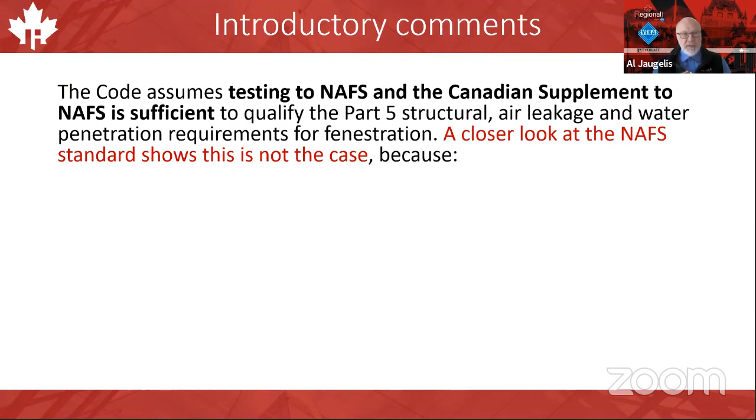A couple of introductory comments to set the stage. The code assumes that testing to NAFS and the Canadian supplement to NAFS is sufficient to qualify the Part 5 structural, air leakage, and water penetration requirements for fenestration. But if we take a closer look at what the NAFS standard says about its testing, we realize this is not the case, because NAFS testing doesn't actually test the structural attachment of the windows to the walls. It doesn't test the air or water tightness of the window to wall interface.

And it doesn't qualify the glass strength of the products either. The fourth item is just the practical reality that it's not possible for manufacturers to pre-test all the possible options of their product lines, so they cannot qualify the complete range of sizes and configurations that architects and customers expect.

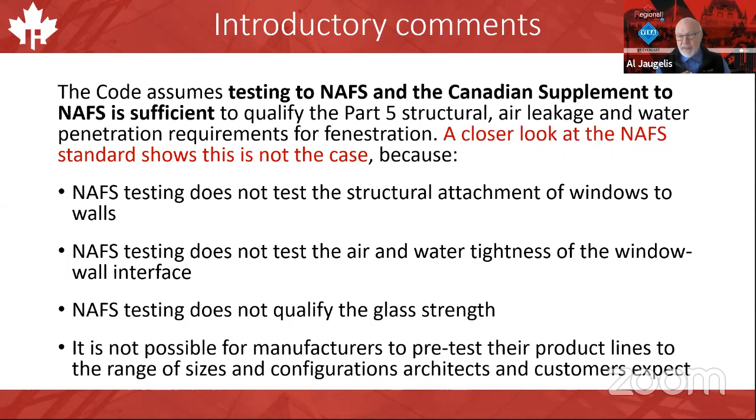Now, in some jurisdictions, architects are required to ensure that registered professionals are involved in the preparation of design and to ensure that the work of the contractor is reviewed for alignment with the design through in-shop or on-site field reviews. So the involvement of registered professionals in design and review can address the things that NAFS testing leaves out.

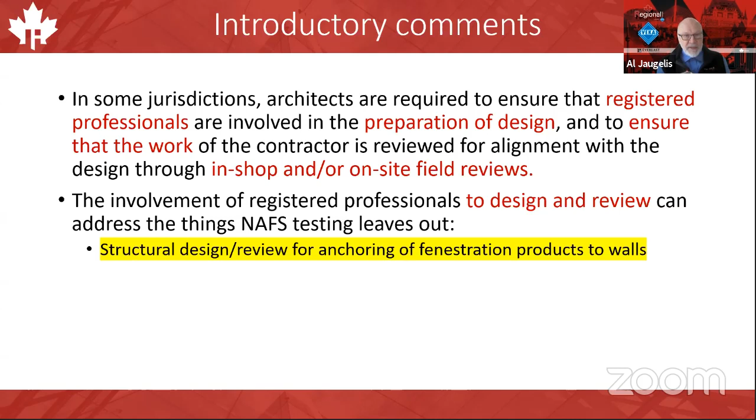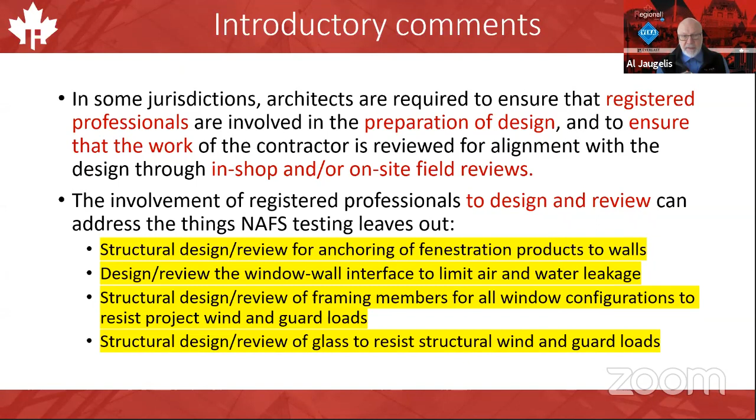The structural design and review of anchoring of the fenestration products to the walls, design and review of the window to wall interface to limit air and water leakage, the structural design and review of framing members for all window configurations to resist project wind and guard loads, and structural design and review of glass to resist structural wind and guard loads.

So in this session, we'll review the Part 5 structural, air, water requirements of the 2019 Alberta Building Code, which are the same as the 2015 National Code. We'll review the limitations of lab testing with reference to the 2011 edition of the North American Fenestration Standard.

And we'll identify areas where professional design and field review are required for windows, doors, and skylights in non-exempt buildings—basically to address the gaps between what the standard covers and what the code assumes the standard covers. Finally, we'll discuss current challenges faced by industry with respect to the need for professional design and field review.

That's a topic Dave will pick up on after Randy speaks. So the topics we're going to cover here—this is not a long presentation, but it's going to set the stage for our subsequent discussions.

First of all, why is the NAFS standard in the code? Is NAFS testing sufficient to address Part 5 requirements? We're going to look at the actual language there, and ask the question: is professional design and field review necessary for windows and doors in non-exempt buildings?

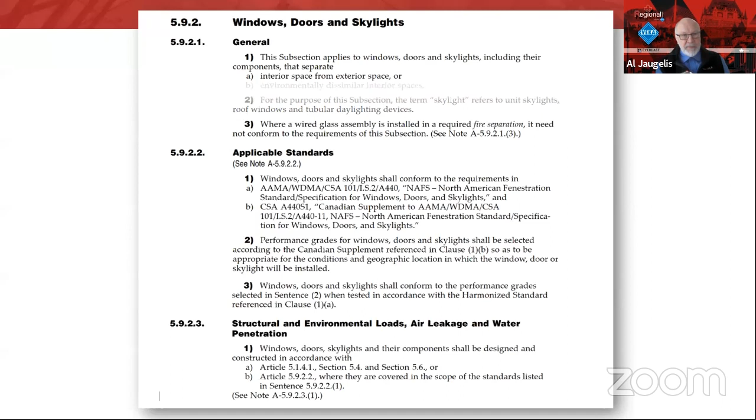So I find it helpful to obscure that for the moment and get right down to why is the NAFS standard in the code, or another way to rephrase it, what is the main thing Part 5 is concerned about when it comes to windows, doors, and skylights?

And we find that right here in Article 5.9.2.3, titled Structural and Environmental Loads, Air Leakage, and Water Penetration. Structural, air, water—these are the three properties the National Code says are the Part 5 properties for windows, doors, and skylights.

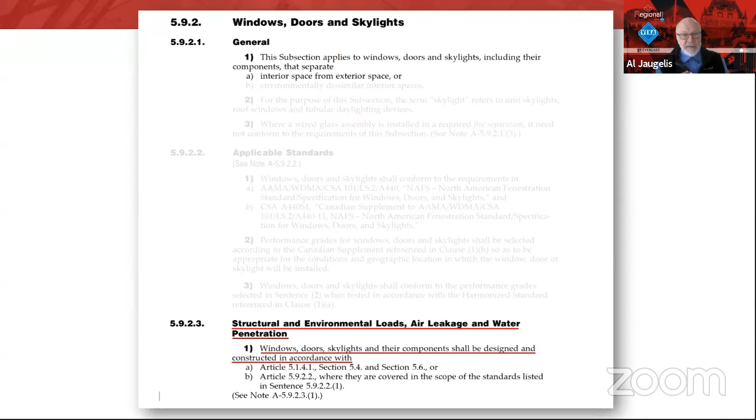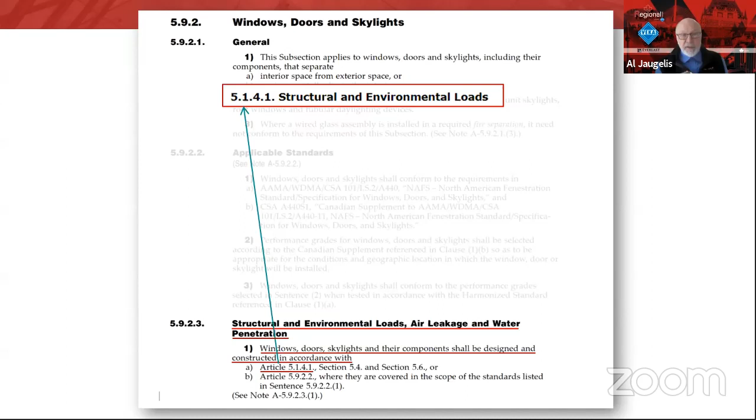And it tells us how they shall be designed and constructed: in accordance with Article 5.1.4.1, which deals with structural and environmental loads; in accordance with Section 5.4, which deals with air leakage; and in accordance with Section 5.6, which deals with precipitation and preventing precipitation from damaging the building integrity or affecting the use or occupancy of the building.

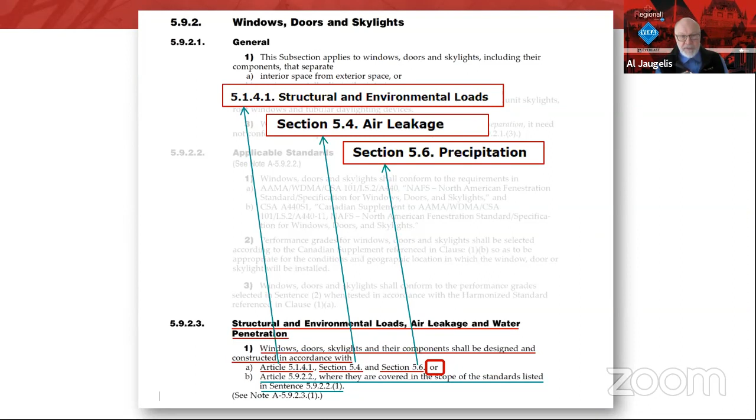And then we have an 'or' - instead of designing for structural environmental loads, instead of managing these three items from the Part 5 point of view, Article 5922, where they are covered in the scope of the standards listed in sentence 59221. Now we come to Article 5922, applicable standards.

This article is telling us that windows shall conform to the requirements in NAFS or the Canadian supplement to NAFS. And then it talks about performance grades being selected and so on. I think it's very important to read this Article 5922 with reference to Article 5923.

What this is telling us is the code seems to think that if products are conforming to the NAFS and the Canadian supplement, they have satisfied the requirements of design and construction to Article 5141, Section 5.4, and Section 5.6. The code leads us to believe that, and I suspect the code writers sincerely may have thought that.

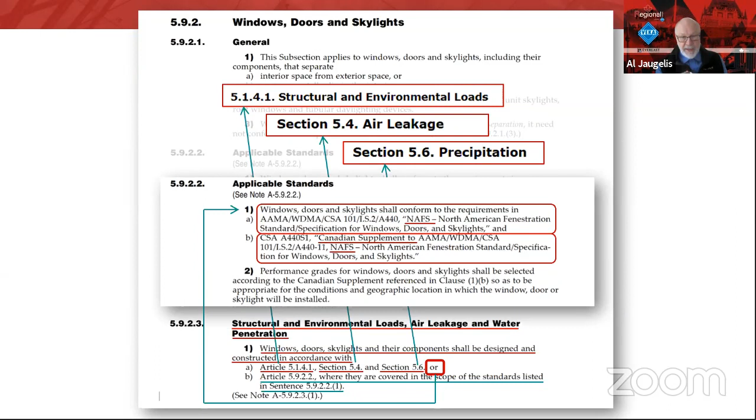But I would say that we need to have a look at the NAFS standard to check that out. So Part 5 makes it clear that the code believes testing to NAFS and the Canadian supplement is one way of qualifying windows, doors, and skylights for structural air-water performance. These standards also qualify secondary attributes such as ease of operation and durability, but those are not the concern of the code.

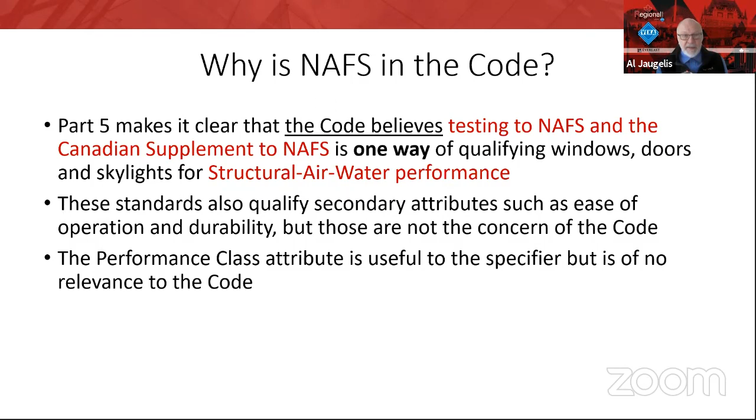The performance class attribute is really important in the NAFS standard for classifying products, and it's useful to the specifier, but again, it's of no relevance to the code. The code just cares about those structural air-water properties.

So let's have a look at NAFS testing, and does it address these Part 5 requirements? Here's what NAFS says about test specimen installation.

These tests are used primarily to evaluate the performance of the fenestration product and are not intended to test the performance of the installation, particularly the perimeter sealants between the fixture and the test specimen and the anchoring of the test assembly to the test fixture. So this is not the intended purpose of the standard. The standard is intended to qualify the product, and not how it's integrated into the building.

And that continues to say - sorry, this is my words, not the standard's words - yes, the testing of actual field installations is not required under NAFS and is not ordinarily performed by manufacturers.

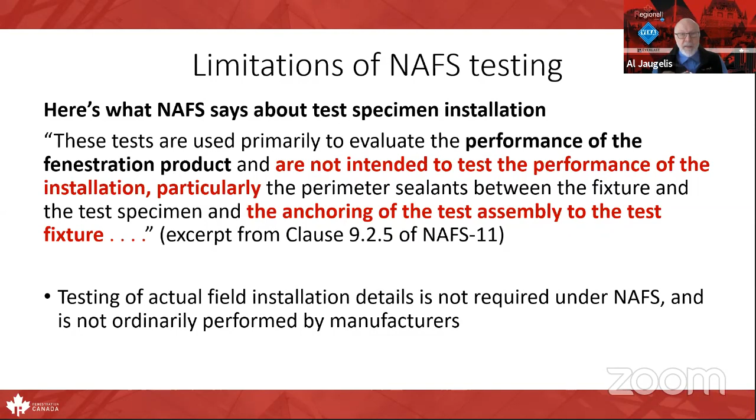So we're going to identify here four important limitations of NAFS testing. For one, it excludes testing of the anchoring method from its scope. Somebody has to deal with that. NAFS recognizes that it's not practical for manufacturers to test every possible anchoring method in every possible substrate.

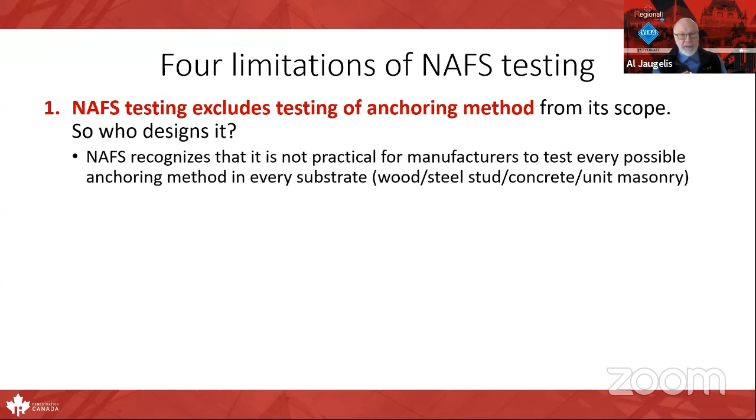There are wood walls, steel stud walls, concrete, unit masonry - each substrate, each wall condition might require different anchoring methods. And even if the methods are similar, you're going to have to require different fasteners given the different shear and pullout properties of fasteners in these different materials.

Secondly, NAFS permits test specimens to be anchored in ways that result in the highest possible structural ratings, and the anchoring of test specimens often differs from real-world anchoring methods. Basically, because the standard excludes the anchoring method from what is being tested, manufacturers are incentivized - they want to get the highest rating for their product because they're competing against company B, C, and D.

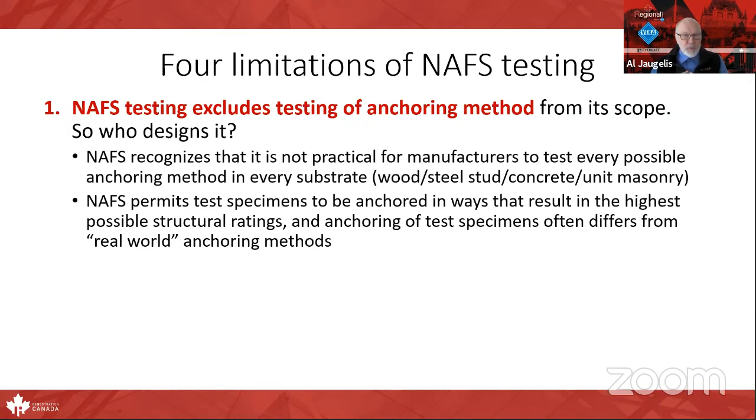And the reality is, if you had the opportunity to witness NAFS tests in a lab, you will typically find the products anchored in ways that are not the same anchoring methods you would use in a typical building configuration.

So it means that because NAFS specifically excludes the testing of any particular anchoring method, it means that it must be designed and reviewed by a registered structural engineer to address the building substrates of the building in question in a way that accommodates expected building movements and deformations.

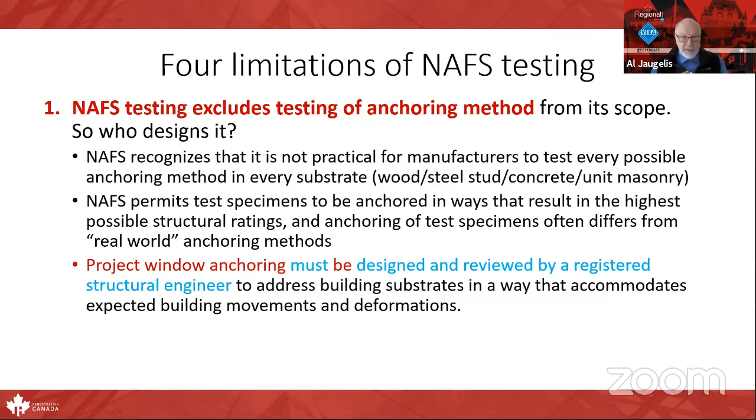It essentially requires there to be a face seal between the fenestration product and the test buck, and it requires that the interior side of the fenestration product be left open for examination to see if water is leaking between the joints of the product. That's the intent of the standard.

So it's not testing your typical weather barrier, or shall we call it the continuity of air barriers and water barriers in the wall to the fenestration product in a real world situation; that is not the purpose of the test. Now, granted, it is possible to conduct a NAFS test with a real world installation method, and that would be a valid thing to do.

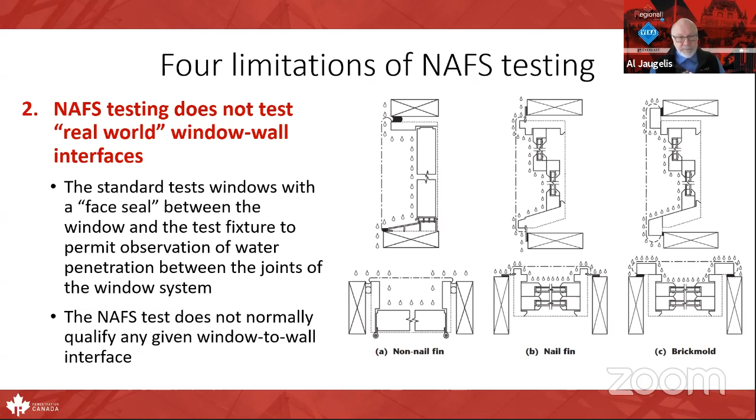But some of the real world anchoring methods require a drained sill pan under the window and other sealants and materials that would actually obscure what's going on with the window frame and make it difficult to tell if the window product is leaking through its own joints or not. And so while it's possible to test real world installations with the NAFS standard, it's not the intent of the standard. And so you can't assume that any given product has been tested with a real world window to wall installation method. So the NAFS test does not normally qualify any given window to wall interface.

Another limitation is that it's not practical for manufacturers to pre-test all the possible configurations of their product lines. Every window schedule will contain untested configurations and sizes. It's just a fact of life. And that means that project-specific engineering or post-award testing is required to qualify the untested sizes and untested configurations.

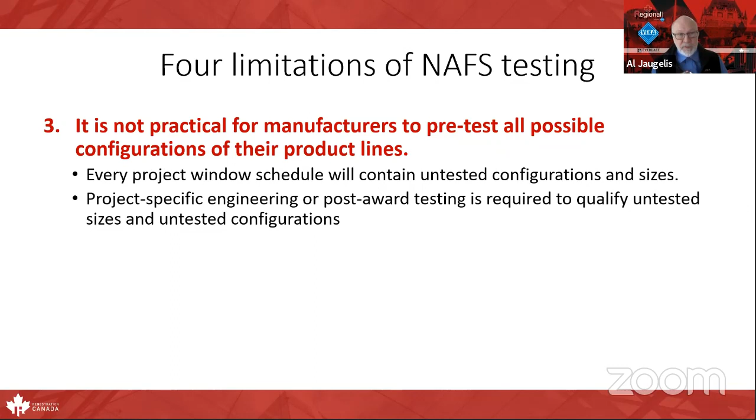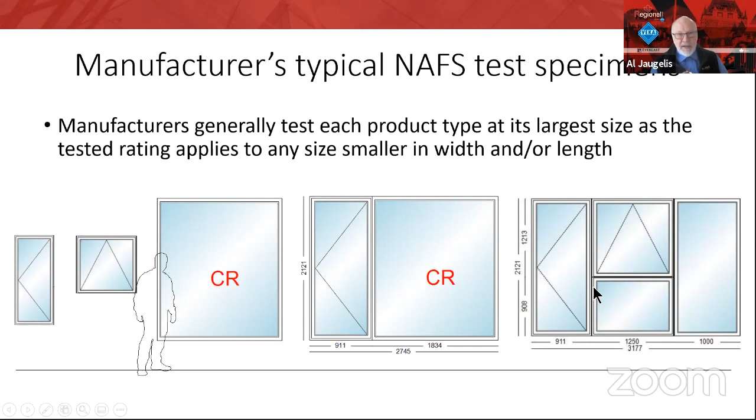And here you are actually testing field mulled joints or frame to frame mullion joints, which is a different kind of mullion condition. So the manufacturer will likely have at least this much testing and maybe a couple of other extra options. Maybe there are some other mullion or coupling options available. But this is the kind of thing you've got on file in your system.

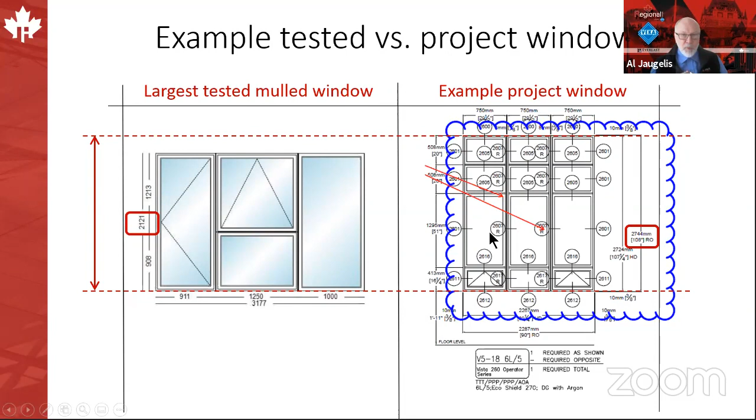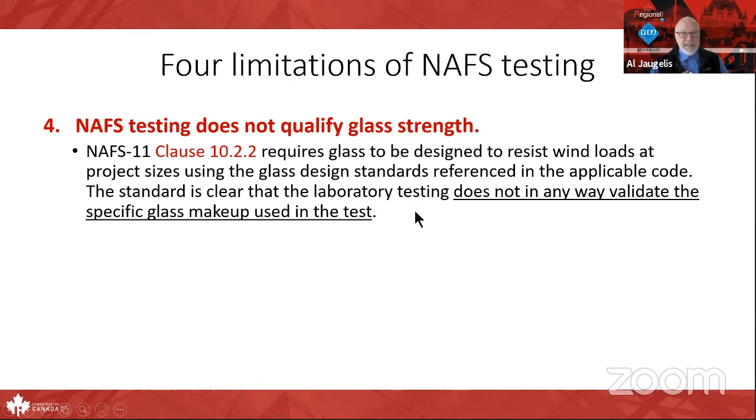So that's the reality. And finally, the fourth limitation is that the NAFS testing does not qualify the glass strength. NAFS-11 clause 10.2.2 requires glass to be designed to resist wind loads at project sizes using the glass design standards referenced in the applicable code. In the case of Canada, that would be CGSB 12.20, and the code now also allows ASTM E1300. But the standard is clear that the lab testing does not in any way validate the specific glass makeup used in the test. So the tested glass is not in any way representative of what should be installed in a window on any given project.

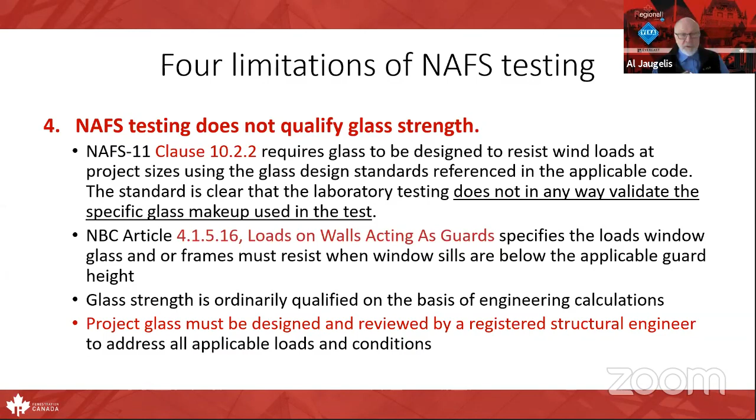National Building Code or Alberta Building Code Article 4.1.5.16, loads on walls acting as guards, specifies additional loads that windows often encounter, which is that the glass and/or the frames of windows must resist guard loads when they are below the applicable guard height. And practically speaking, in the industry, glass strength is qualified on the basis of engineering calculations, not on the basis of physical testing. That means that the project glass must be designed and reviewed by a registered structural engineer to address all the applicable loads and conditions.

So NBC Article 3.3.1.18 requires guards to be present where there is a height difference of 600 millimeters or more from a walking surface to an adjacent surface. And that means that walls are also expected to act as guards. In fact, NBC Article 4.1.5.16, loads on guards, walls acting as guards, specifies the specific loads that walls must be designed to ensure that they can function as guards.

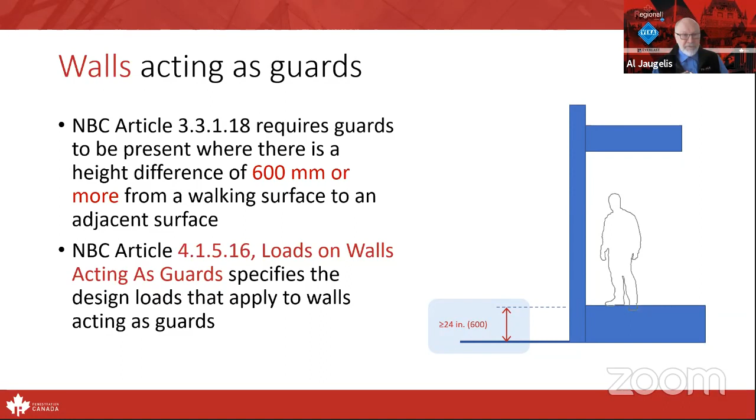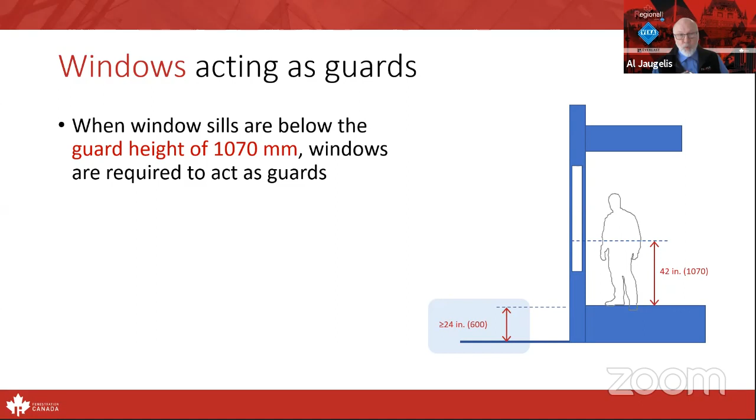When windows are integrated into those walls, then windows also are subject to this requirement. And when window sills fall below the guard height of 1070 millimeters, windows too are then required to resist the same loads as the wall would acting as a guard. So the glass or a horizontal mullion must be designed to resist the same guard load as the wall. If there is no mullion at the guard height, the glass needs to do the job.

Alternatively, a mullion could be introduced at the guard height, but you'd want to make sure that the load there would be transferred to the wall, and you would also want the guard load to be added to the glass wind load for a proper calculation of the glass strength, because the code requires you to add up all the possible loads that could act on that glass. Alternatively, you can avoid this problem by installing a separate standalone physical guard in front of the window, which is not something people usually want to do.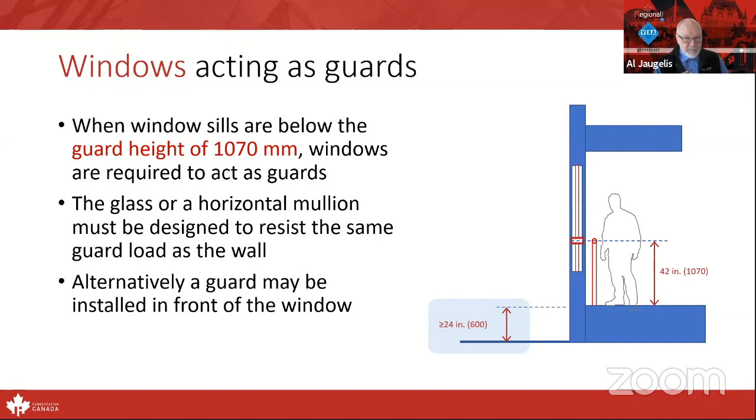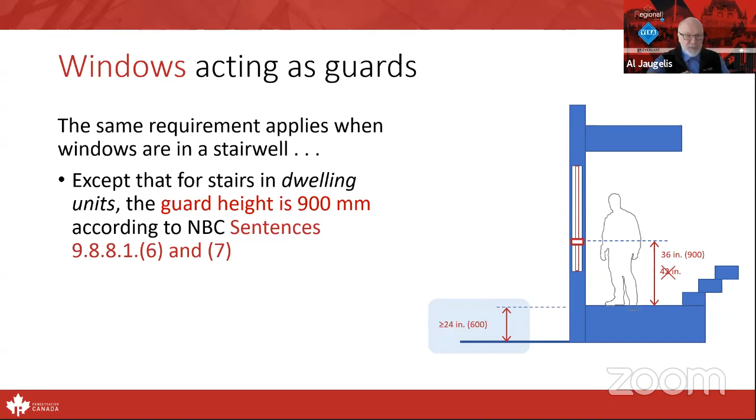Now, the same requirement applies to windows in a stairwell, except that for stairs in dwelling units, the guard height is reduced to 900 millimeters, according to NBC sentences provided here. So we clearly see that even if you could qualify the glass design of a window through NAFS alone, you would still be faced with guard requirements, which affect a surprising number of windows.

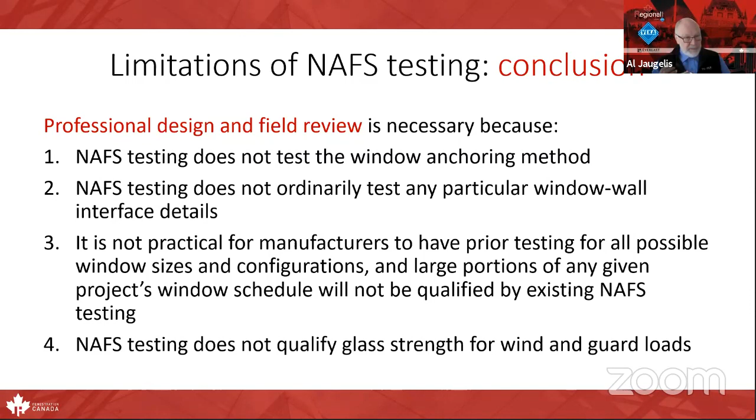So to answer the question, is professional design and field review necessary to qualify the design and installation of windows in non-exempt buildings? We have to say yes, it has to be necessary, because NAFS testing doesn't test the anchoring method. It doesn't test any particular window to wall interface. There is not generally enough test data available to qualify all the possible window sizes on any given building. And it does not explicitly qualify the glass strength for wind and guard loads.

So at this point, I'd like to introduce Randy Krebs, an architect and the Director of Practice with the Alberta Association of Architects, because he's been involved in the development of this presentation, and Randy is aware of the content that I've presented here, and he's asked us to let him say a few words at this point of the presentation.

Yeah, that's great. Thanks very much, Al and Dave, first of all, for inviting me and giving the opportunity to just supplement this presentation. It's very informative. There's a lot that I learned even being part of this process. The level of technical expertise that Fenestration Canada has is very impressive, and we're very pleased to be delivering this content in partnership with you.

So we just wanted to add on to what has been said already, and give the participants a few reminders from the regulator's perspective. So just a quick summary. The Alberta Association of Architects is the regulatory body. We handle all the registration and licensing of members and firms in the province that practice both architecture as well as licensed interior design. But for the purpose of this presentation, since we're dealing with building envelopes, we are limiting our discussion to the architectural components, of which LIDs are excluded from providing service.

And the Home Depot people in Kamloops basically said, Ply Gem really needs to step up their NAFS, because here's these windows, they're larger than anything Ply Gem makes, and they got a PG 50. How can you explain why you suck and these guys don't? And I said, next time you're out on the job site, give a little push on the mullions with your pinky finger. And then think of what's going to happen when a serious windstorm comes up at that site, and whether the glass is going to be subject to breakage for excessive deflection.

So these are possibilities out there. If you're dealing with companies that don't know what they're doing and are not following the correct process, you can get yourself into real trouble.

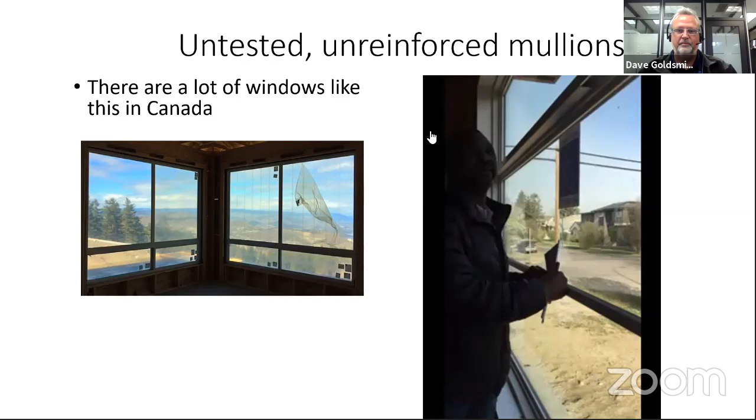Thanks, Al. Yeah, you're welcome.

Yeah, it's almost like there's separate mini industries within the overall industry. And sometimes you get builders, consultants, owners transferring from one building type to another. That's where some difficulties can occur.

Okay. Let's go to another question. Someone's asking, what sections of the building code relate to NAFS testing as a requirement for doors? I can handle this, Al, if you like. Sure. So it used to be that NAFS didn't apply to swing doors or slide doors. There was a different standard. But when NAFS came along, it started to apply to swing doors and slide doors. So they fall into the same system and they have to meet the same requirements.

That having been said, there's not a lot of field water testing of the swing doors, because it is difficult to get the lab tested values with a lot of swing doors. I mean, the panels are a commodity item. There are thousands of panels to choose from, thousands of door lights to choose from. The panels may have embossing that will interfere with the seal, and they may have a surface roughness on the edge that will interfere with the seal.

So in order to guarantee that your swing door is going to pass a field water test, you would really need to sand the edges of the panel, make sure the door was perfectly adjusted, and lock properly with a multi-point lock and adjustable hinges. And so what we find is that they tend not to test the swing doors. They tend to be under large overhangs anyways, and there's no history of failure leading to building envelope damage for swing doors. So they tend to ignore those in the swing door water testing.